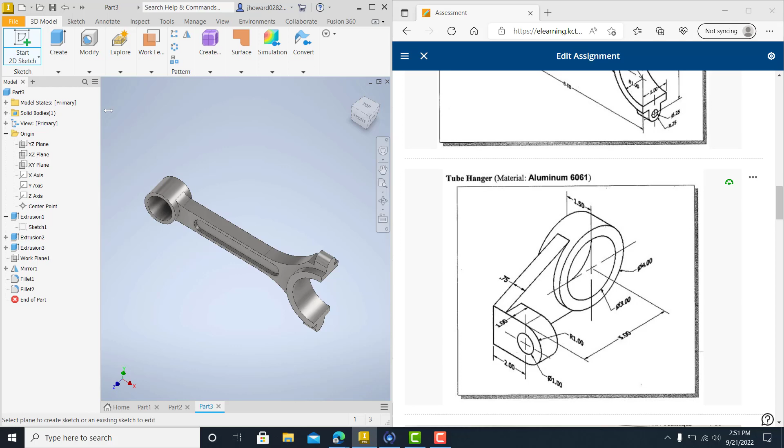File new standard IPT. Start a new 2D sketch. I like to start out on my XY plane. And let's minimize this so we can see our drawing.

Tube hanger, here we go. First thing I do is I would put myself a 4-inch diameter. Okay, and looks like inside is a 3-inch diameter. Let's get that one put in.

Sweet. Line going straight across. I really don't know where it's going to be honest with you. Well, I do know it's going to go over to 5 inches from the center, which that's good. We're right there at that quadrant.

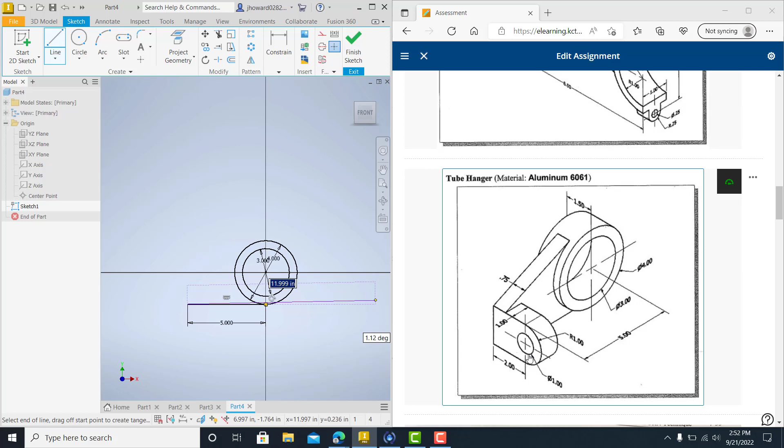We're going to come up, it looks like, well, you got a radius of 1 inch, so you know that would be 2, because it'd be radius here, it'd be 2 down here, so we'll do 2. Coming across 1 inch.

Let's see, come over to that. No, I really didn't need to do that. That was a silly move.

So I want to take my line and I would go right here and I want to be tangent into this. See right there how it's catching that tangent, y'all see that little symbol right there? Perfect. And trim out what I don't need, and finish my sketch out now.

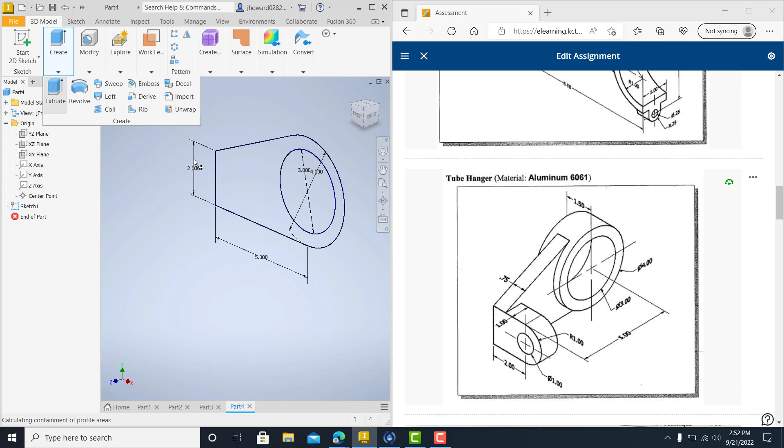Alright, I need to extrude this. I'm just going to extrude it truly. I'm just going to extrude it to 0.75 here.

Start myself a new sketch on the face of this. I want to use a rectangle. Come all the way up there and just bring it over, coming over, it looks to me like 1 inch.

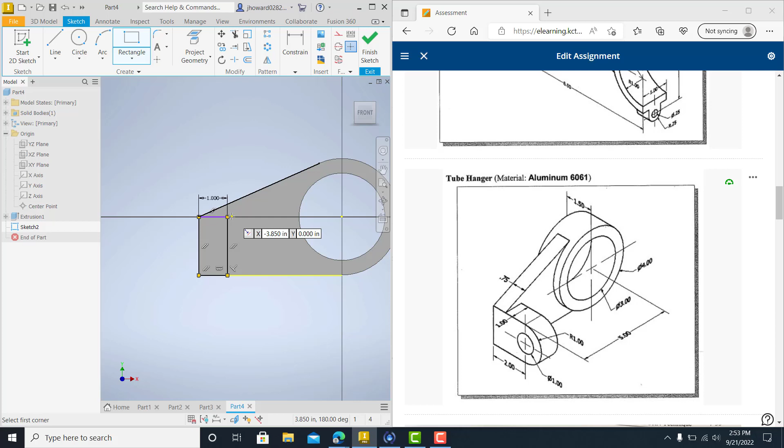Finish sketch. I want to do an extrude of this. I want to bring it out 2 inches. Well, this is 0.75, so 2 minus that 0.75 would be 1.25, plus another inch here, which would be... I'd have been better off to put it on the very end of that. That's my bad.

So I'm going to have a little bit more in the history than I want, but this is okay too. 0.75 plus 1 would be 1.75.

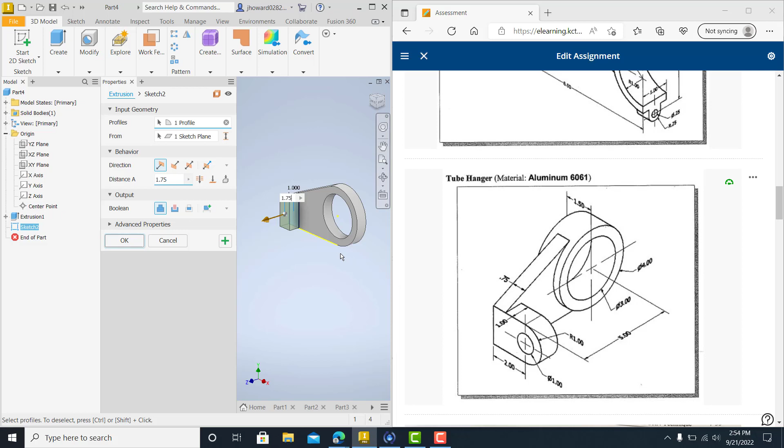The reason I'm going to go in here and just do like I did last time: create, modify, fillet, and that radius is 1, so I just hit 1, hit that, and hit that.

That wasn't what I wanted. I got to hit that and hit that. Okay, see, that ended up, I had to fillet. If I'd done it from the other side, it would have been a whole lot less aggravation.

If I'd done it from this side and brought it over, I could have done this and put the hole in it, with less history. But again, it doesn't matter. However you want to draw it up.

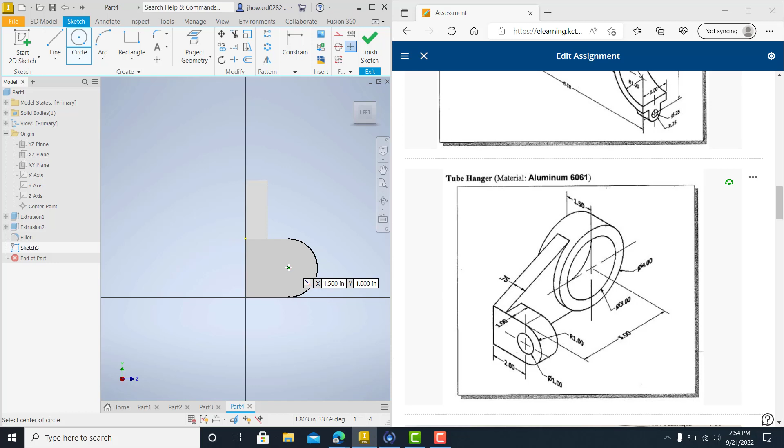I'm just going to go here and put this hole in. That hole is diameter of 1. Finish the sketch out, and then you have to do your extrude, do a cut, and of course, I'm not going to tell it all the way through.

Yeah, I can do through all. I was just afraid it might hit that back there. Through all, it's fine.

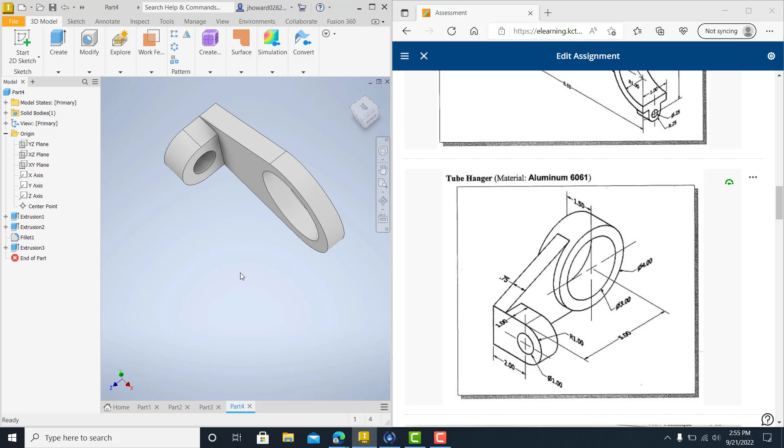So it's looking good. Only thing now that you have to do is, there's a couple ways of doing this thing. I've got to be out here a little further. I want to show you guys a trick.

Now, you could have made this larger and cut that out, or just done a new sketch on this one, draw it up, go the other side and do that. But check this out. You can go in here to work plane.

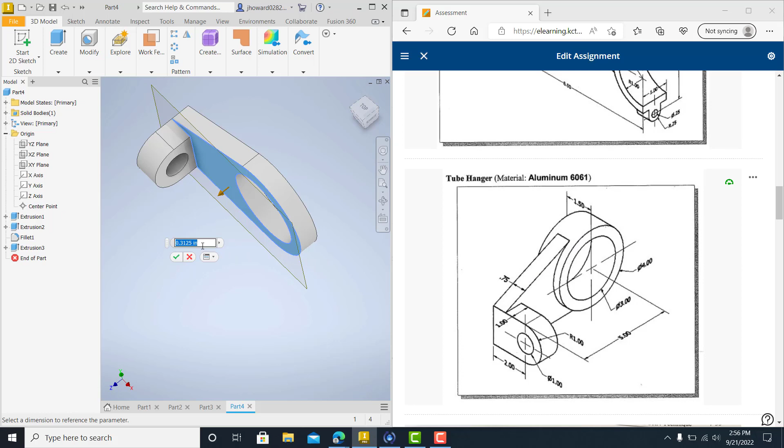Offset from plane, and catch this flat surface and bring that out that depth, whatever this is right here. 1.5, this is 0.75. So 0.75, 1.5 minus 0.75 is 0.75. Divide that by 2 is 0.375. Okay? See how that brought that out from that?

So now, if you go in there and start you a new 2D sketch right on that plane right there, what you can do is first you can project geometry. What that does is if I turn that just a little bit so you can see, if I catch that circle, see how it brings it out there and puts it on the plane?

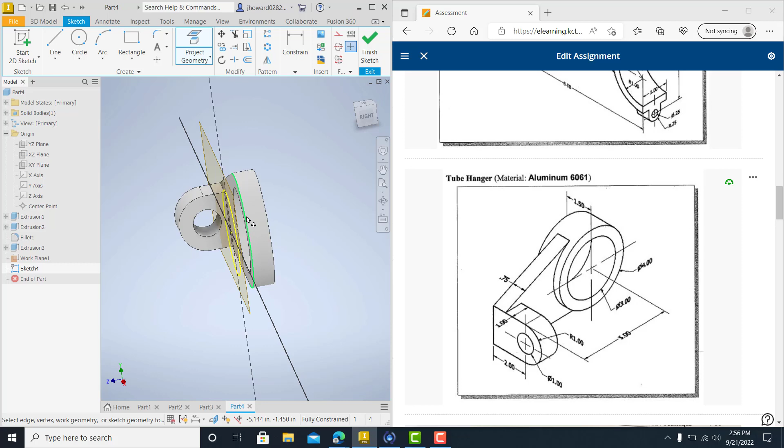And I can do the same thing with this, but I don't want to do that because it's not going to go all the way around. I need to go all the way around. So I just go in there and grab myself another circle and bring it all the way up to the top, or just hit 4.

Hit the flat on that. And you kind of see what I'm doing now. Finishing the sketch. And when I go to extrude it, I can go back 1.5 and join it all together. Do y'all see that?

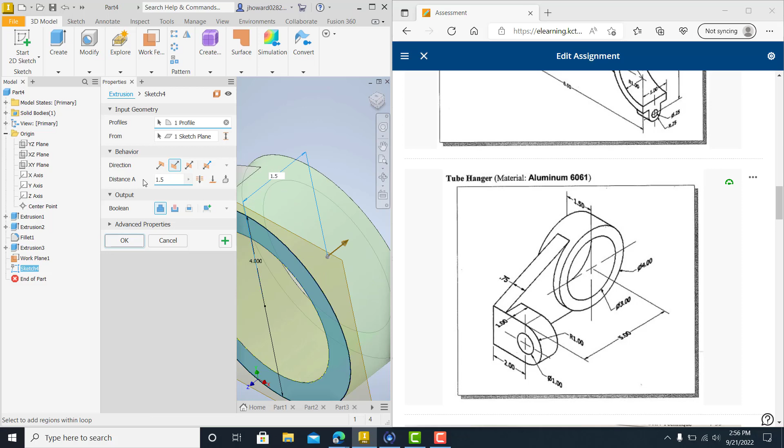And there's your part. And again, click on that. If you want to hide it, you just turn the visibility off and you can see it up here in your planes, or actually right here. It's turned off. Any questions on that one, just let me know.

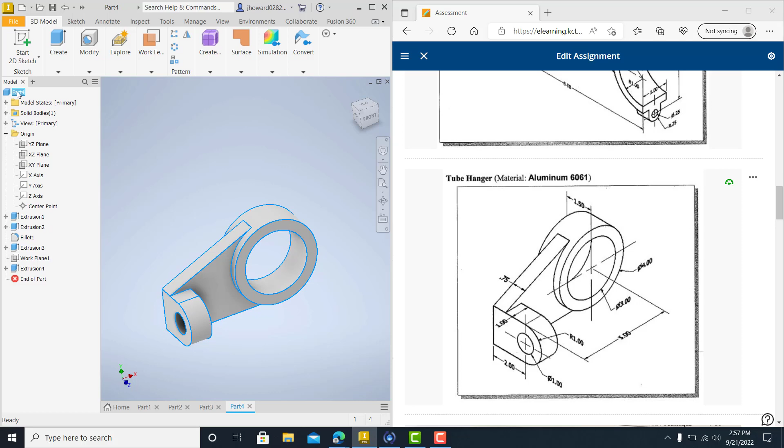Also turn it, make sure that you change it to... right click on it, go to iProperties and change that physical status to aluminum 6061. Apply, close. All right, if you have any questions, let me know.